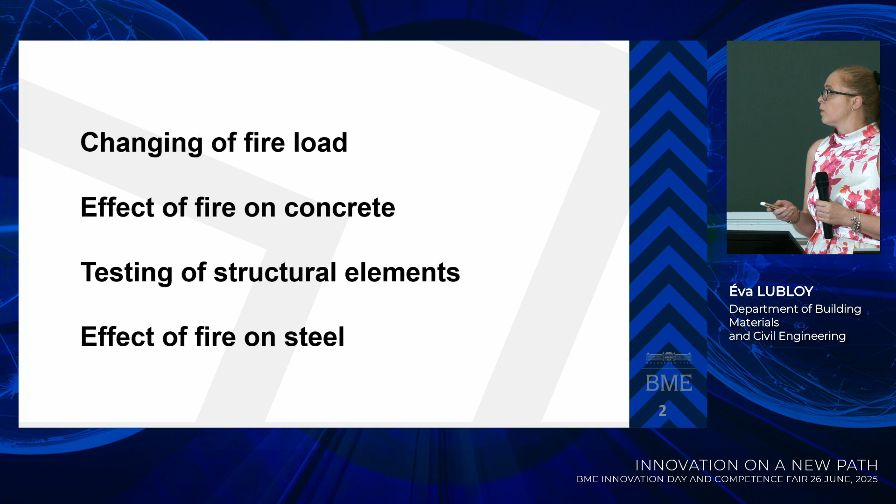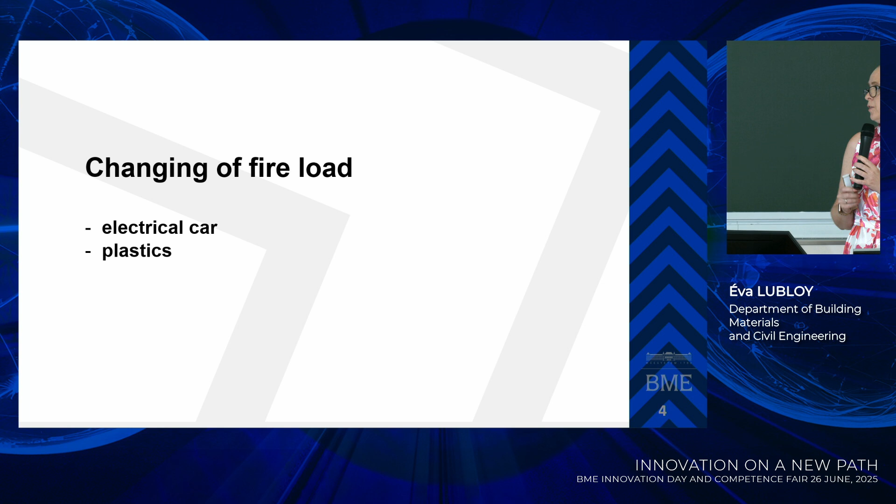The changing in the fire load is important if we see - they come from electrical cars, from accumulators, and we have some problems with the new materials, for example plastics. We should know that plastics and electrical cars have other fire behavior than other materials. We have higher fire development, and they give more energy for fire.

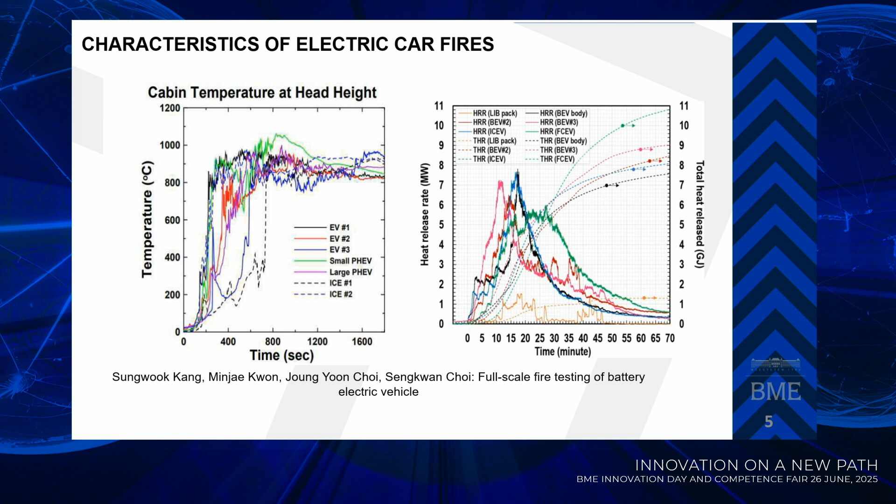I think it is very dangerous, and we should think about this, that the fire load has changed, materials have changed, and we should think more about fire protection.

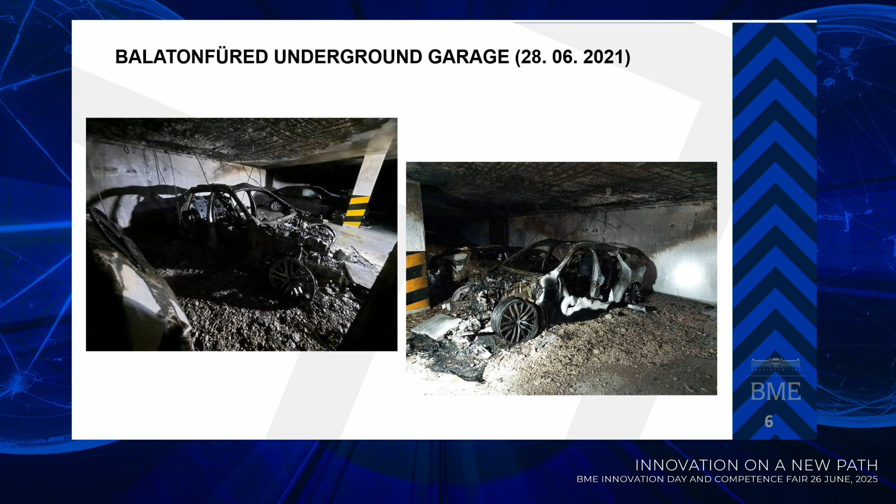It is important that the number of electrical cars is always increasing, and we should be thinking about the protection, how we could protect the buildings.

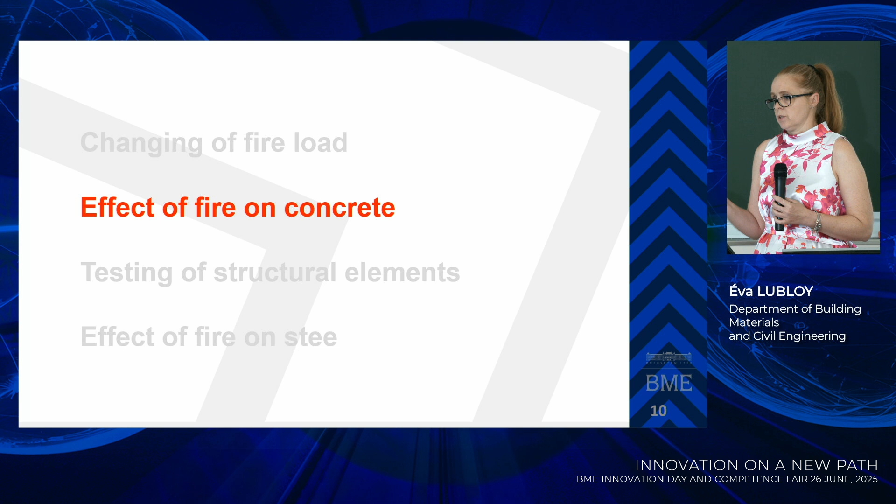What happens with concrete structures in fire? First, it is important that we have changes in concrete technology over the years. Requirements from the engineers are for higher concrete strength. From this we have higher density, and we have smaller cross sections. And we have new concrete types.

One interesting concrete type is geopolymer concrete. Geopolymer concrete doesn't use cement, and it has very high fire protection, but at the moment we have problems with the production. From this, we can have problems with concrete structures in fire.

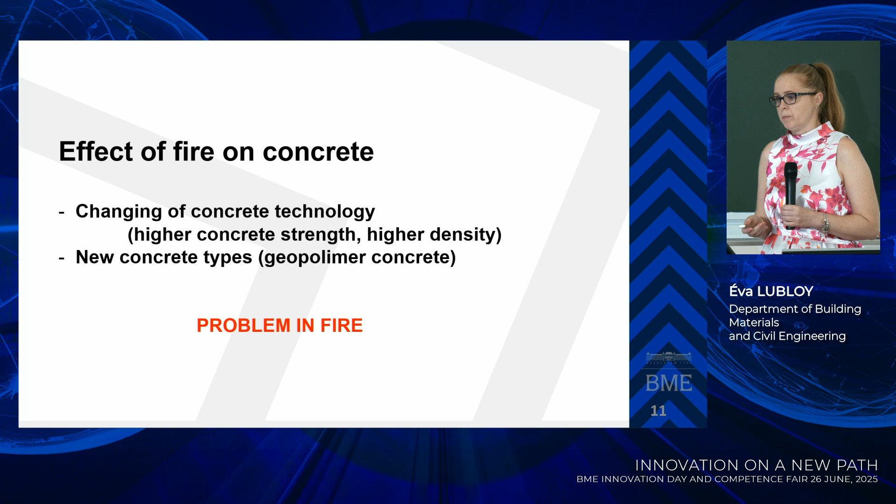What happens with concrete structures? I think it is not dangerous, the spalling of the corners. It's not good, but it is not really dangerous because we do not have damage to the load-bearing structures.

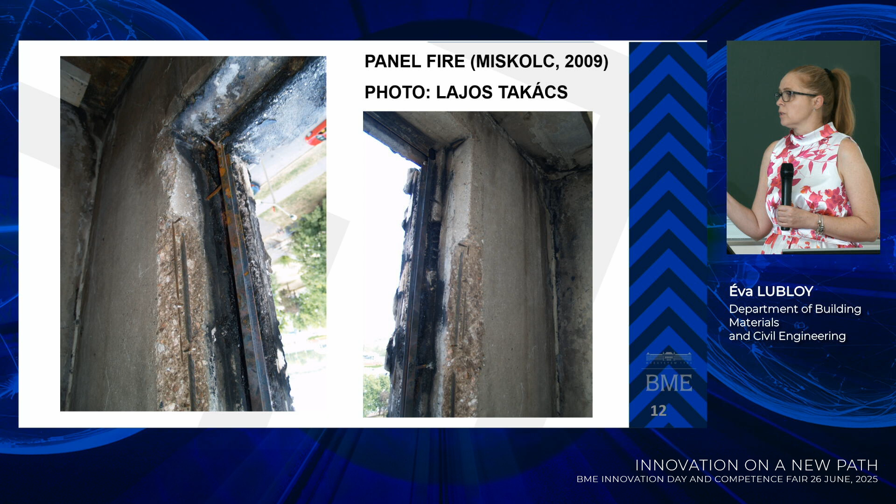But in this case, if you have hollow core slabs, then the underside can collapse, and we can have some problems with hollow core slabs. Hollow elements are really dangerous in fire because we have other heat effects inside these holes.

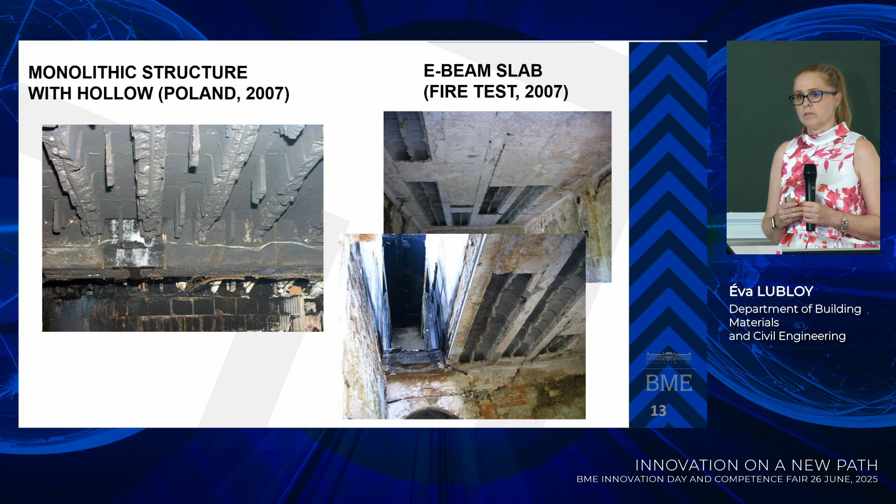You can see that is a reinforced building structure. We have relatively large deflections and a relatively large amount of spalling, but they don't collapse. This picture was made about 15 years ago.

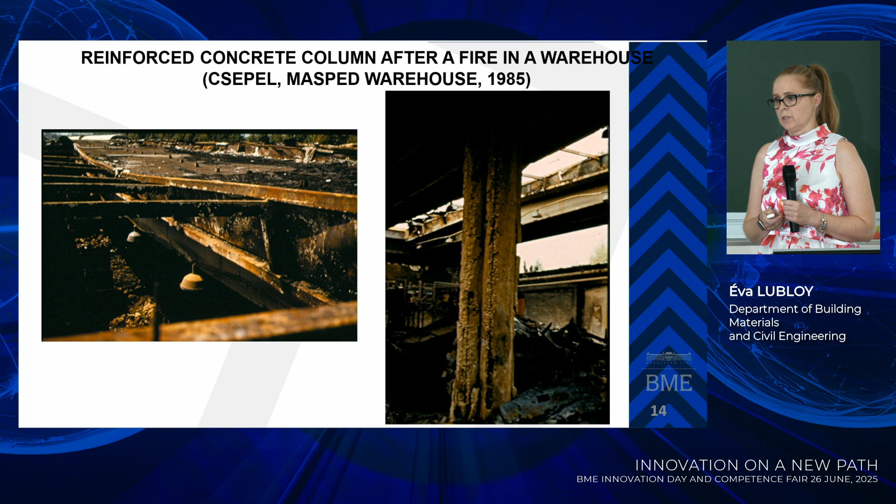In this time, we did not have good concrete. We did not have high strength concrete. We did not have high density concrete, and at this time, it was not dangerous if we used concrete.

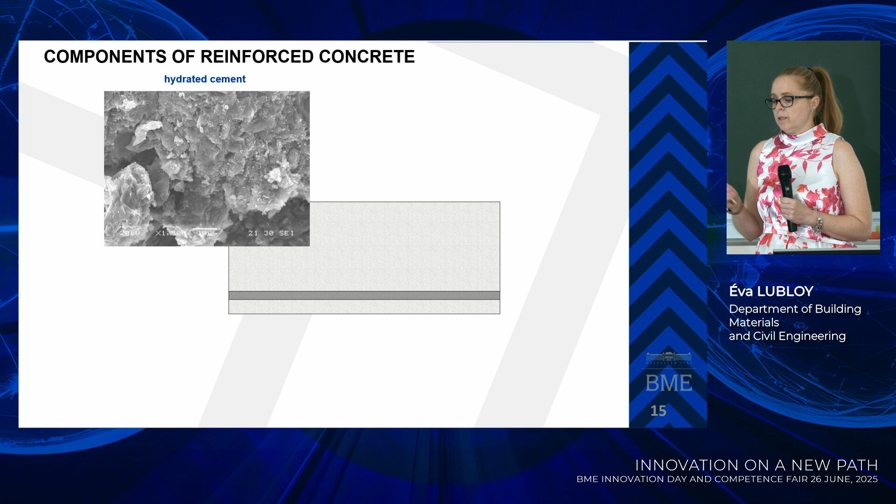What happens with reinforced concrete in fire? First of all, we have hydrated cement, and this decomposes as a function of temperature. We have aggregate - the bond of aggregate to cement stone decomposes too. We have fibers - the fibers could help in case of fire, I'll explain later. And we have bond between reinforcement and concrete, which decomposes too.

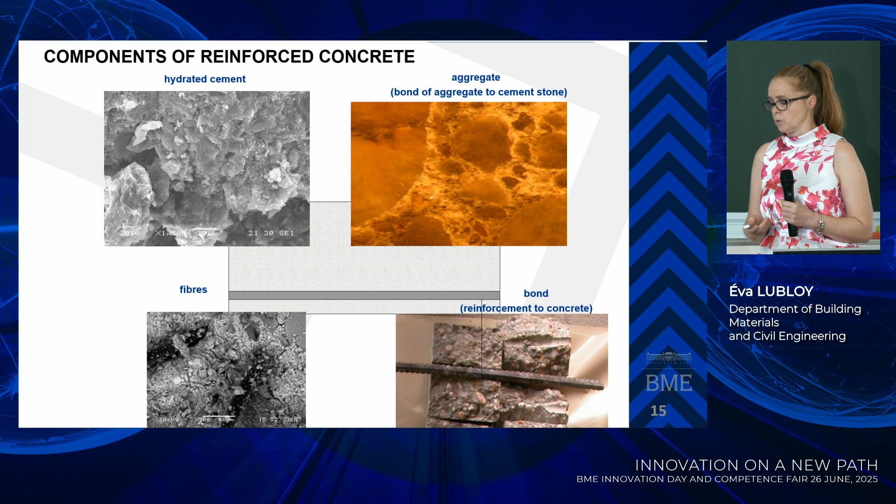Why could fibers help? We have other problems in fire, the spalling of the concrete cover. The spalling of concrete cover comes from the escape of water in fire. Water boils in fire and escapes in the form of gas.

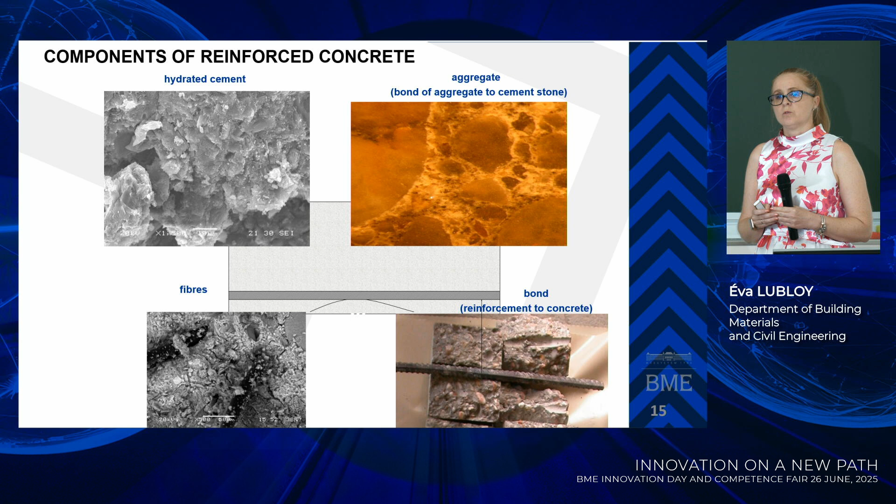But if we have no pores, we have higher density, higher concrete strength, then we have spalling of the concrete cover. If you use plastic fibers, then after the melting of the plastic you can have some extra holes, and water can escape from the concrete.

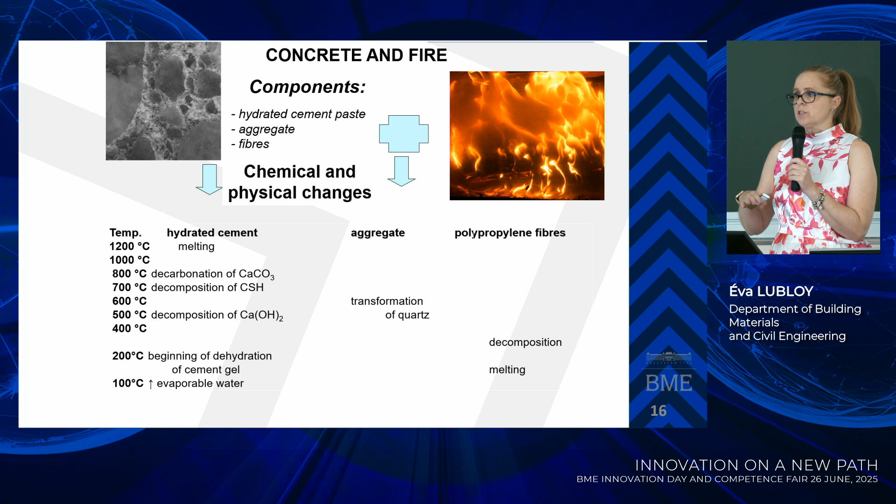The first is calcium hydroxide, and it decomposes after 500 degrees. We have calcium silicate hydrates, and they decompose after 700 degrees. Calcium hydroxide is responsible for the bond characteristics, the bond of aggregate, the bond of reinforcement. And calcium silicate hydrates give the strength of the concrete.

These are important things because by choosing a good cement type or good supplementary material, we can reduce the amount of calcium hydroxide and we can make better concrete.

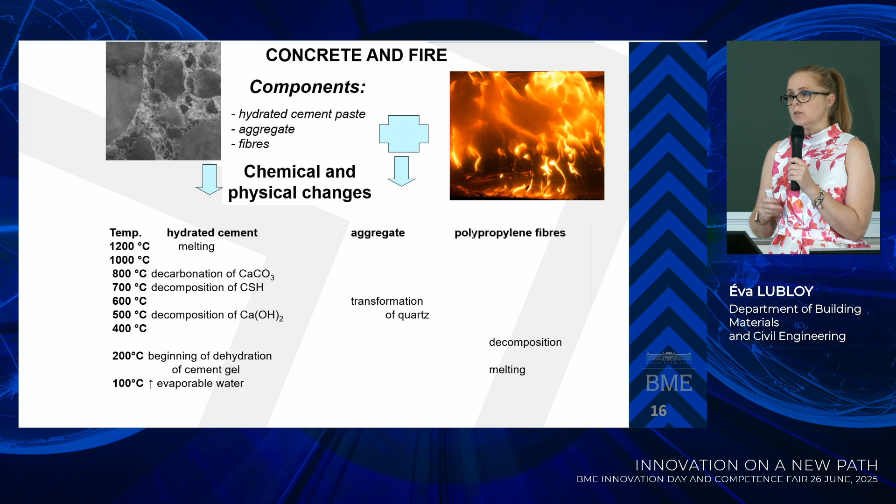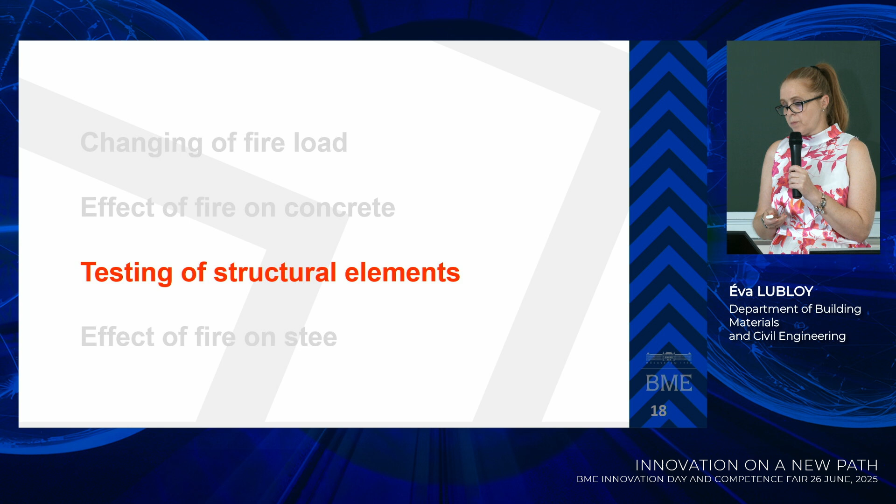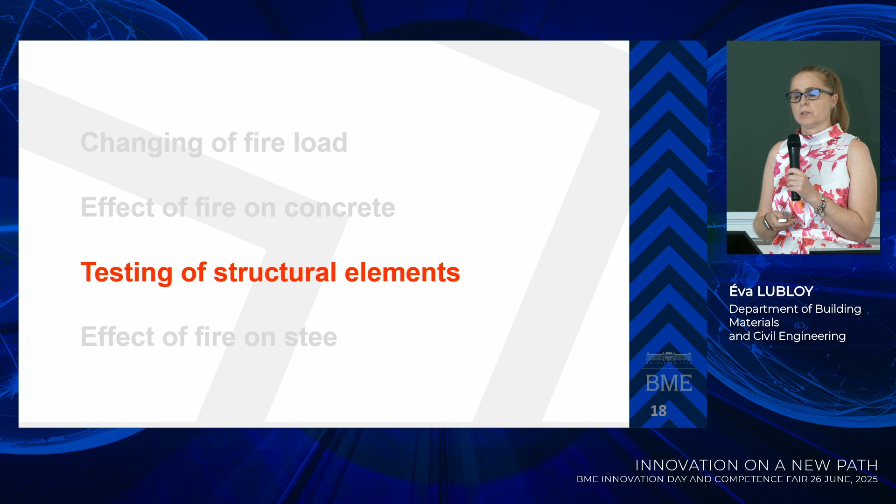It is always important working with the industry. We have made a lot of lab experiments. We say that concrete composition is perfect, but the question is, is it good for the production of structural elements? We have made testing of structural elements too.

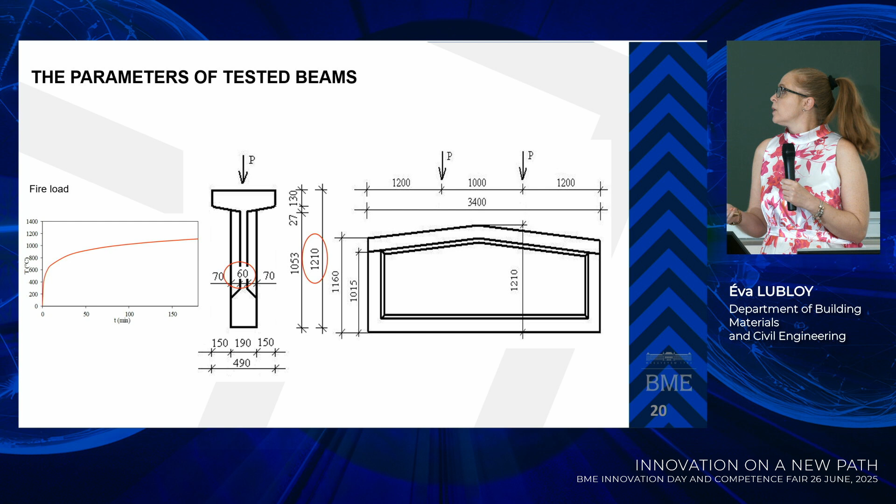I will present two interesting cases. The first was about 20 to 30 years ago. It was a very interesting element because we have a small girder, 6 centimeters is nothing, and relatively high, above 1 meter. These elements are really dangerous in case of fire because the heating of the girder is rapid.

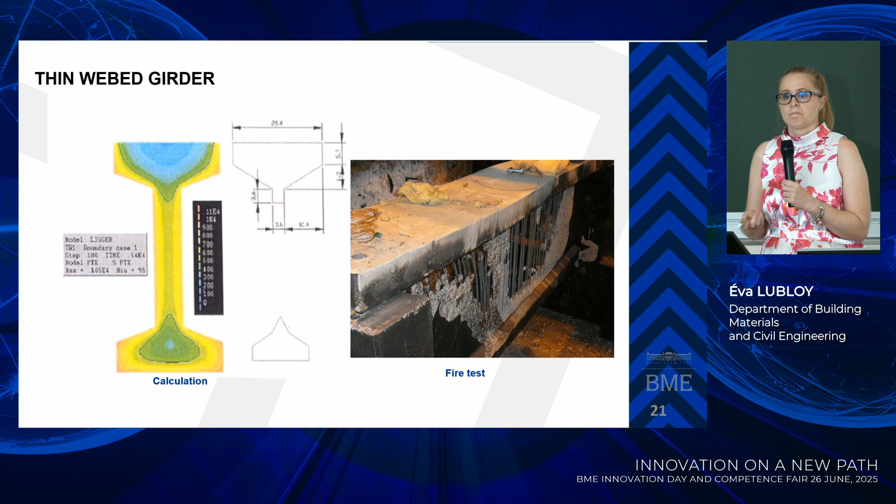Is it possible to calculate? The answer is no, because if you use the 500 isotherm method, then we see that we have no girder. In this case, we have nothing to transfer the shear forces. So we should make fire tests. Fire tests are really big element tests.

The first was the situation after 12 minutes. I think it is good to see that the spalling of the concrete cover happened, and the girder collapsed. Okay, the question is how we make good concrete composition, how we make good girders.

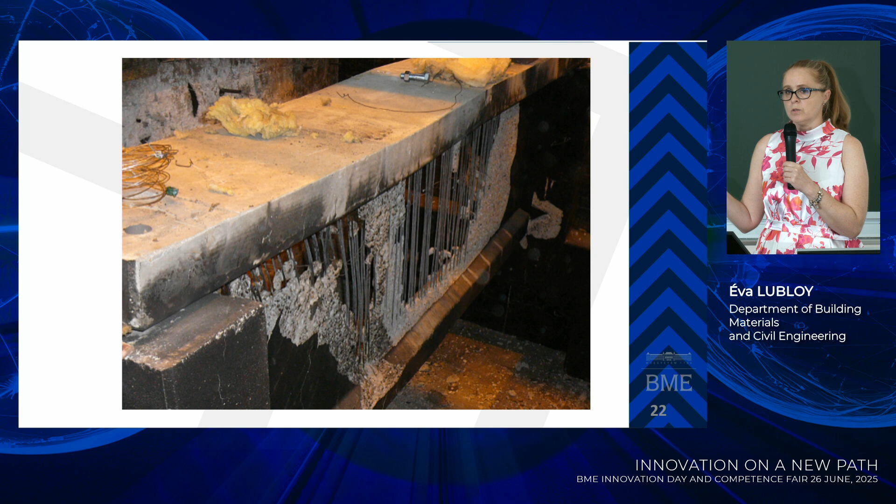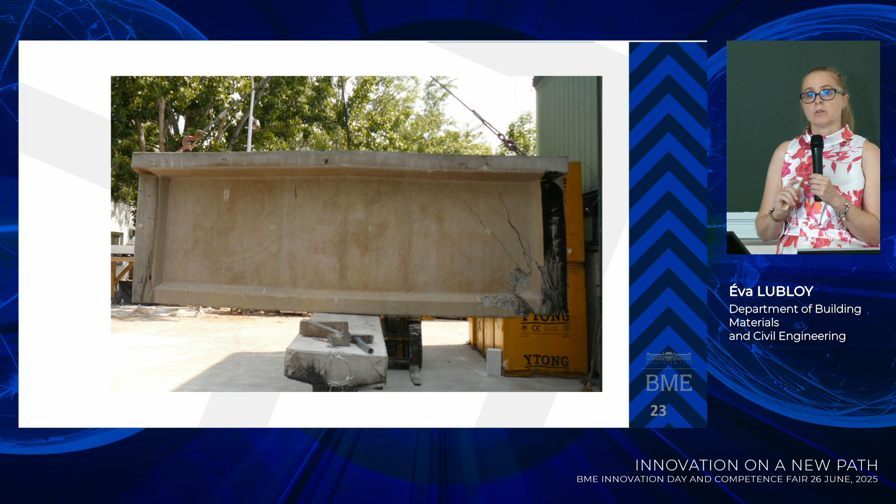The requirement was from the industry 60 minutes, and we made 71 minutes fire resistance, only changing the concrete composition. Nothing was changed in the structure, the reinforcement, or the geometry - only the concrete composition. The conclusion: we have a relationship between the microstructure and the structural element.

For that it is very important to have research in the university, so that we know what happens in small samples, because in big samples, fire experiments are very, very heavy to make. What have we made?

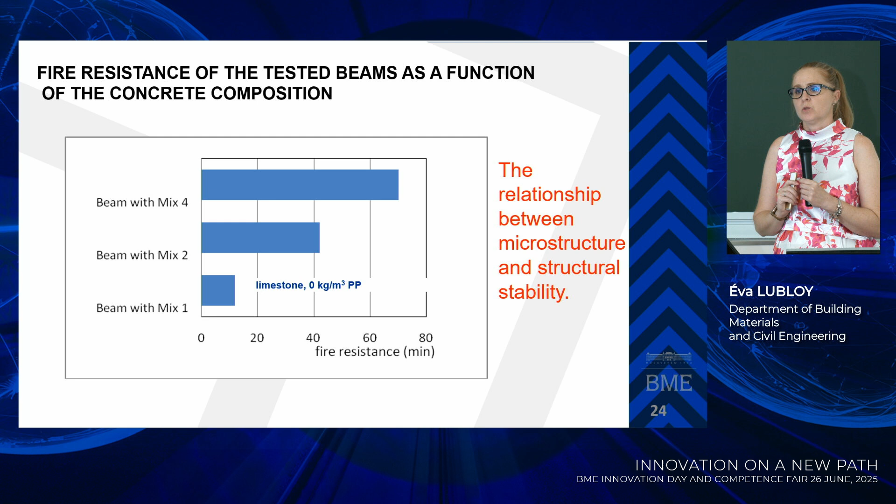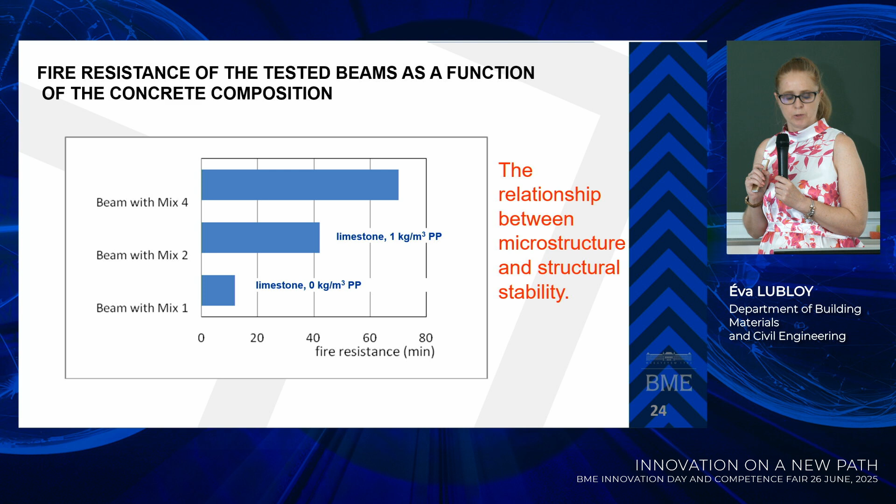First, the experiment was made with supplementary material limestone, without polypropylene fibers. Second, the experiment was made with limestone and with 1 kilo polypropylene fiber per cubic meter. In this case we see that we have over 40 minutes fire resistance. It is good, up to 12 minutes, but the requirement was 60 minutes.

What could we make? We changed the supplementary material to slag, and slag is not sensitive to fire, and we can have more than 60-minute fire resistance.

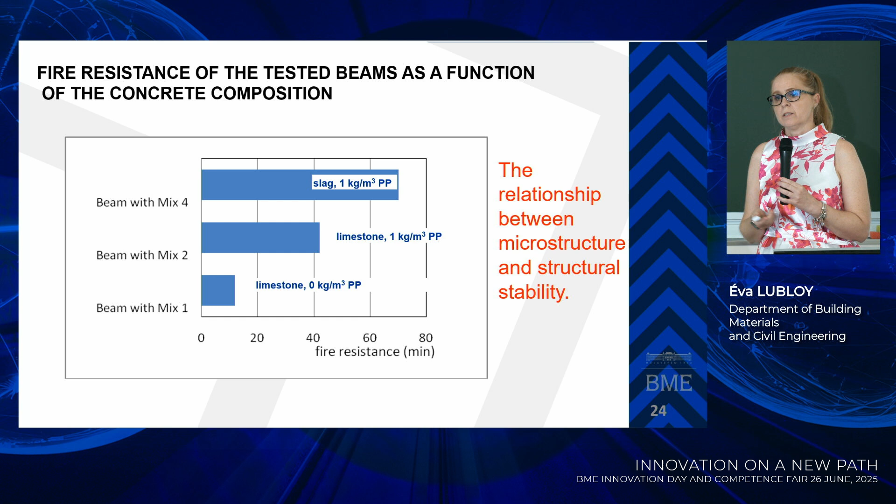Another example, from about 5 to 10 years ago, was wall panel elements. Wall panels are interesting because they have high fire requirements. They have insulation and load-bearing capacity, and they should protect against flame effect too.

We have tested this also in fire. The first result was only 90 minutes. The requirement was higher than this.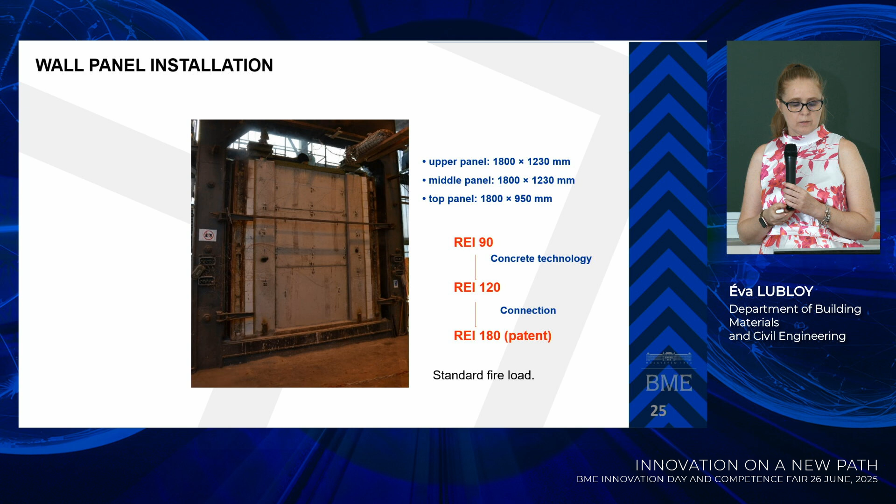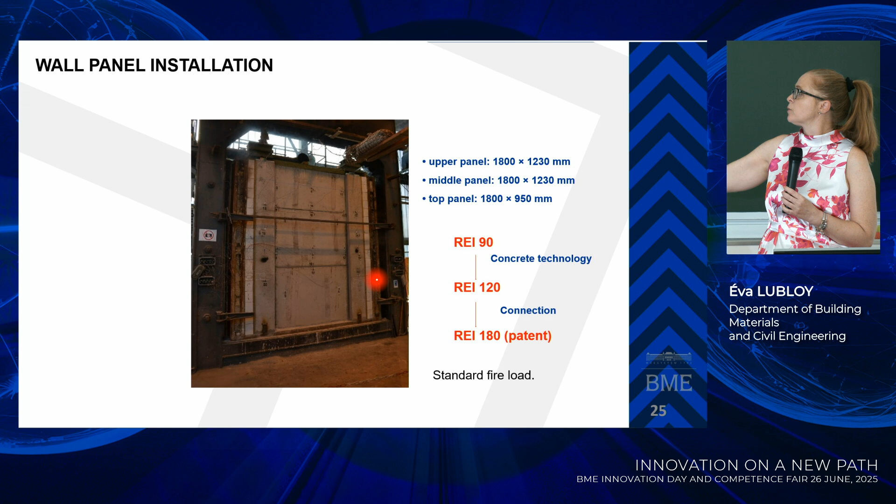Changing the concrete technology, we used polypropylene fibers and slag too. We achieved 120 minutes, and we have flame effect by the slabs. It was a problem that if the flame came out, the structure would collapse. So we worked on the connection, and after working on the connection, we could have more than 3 hours fire resistance.

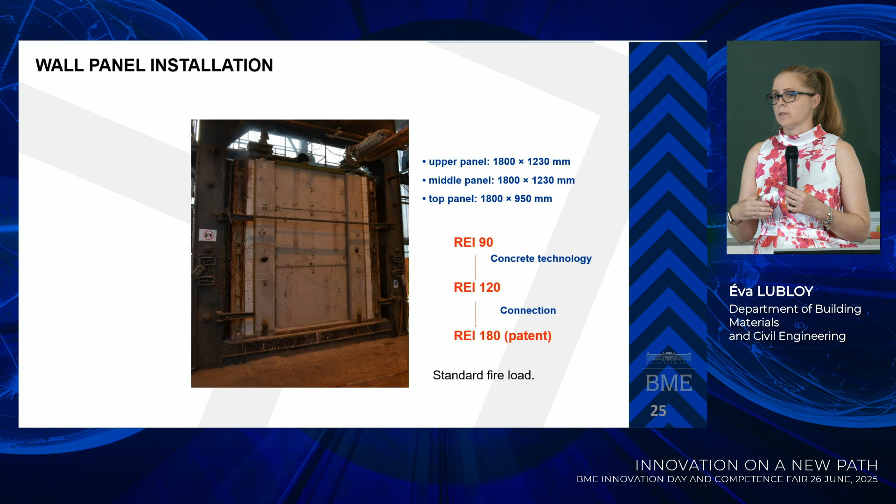I think it is very important in the industry that we have walls that could protect the industry parts. So what happened with the elements?

First, in the first mix, we have spalling of the concrete cover. I think it is clear to see that the reinforcement deformed. In the second, after changing the concrete composition, we have a smaller amount of spalling of the concrete cover.

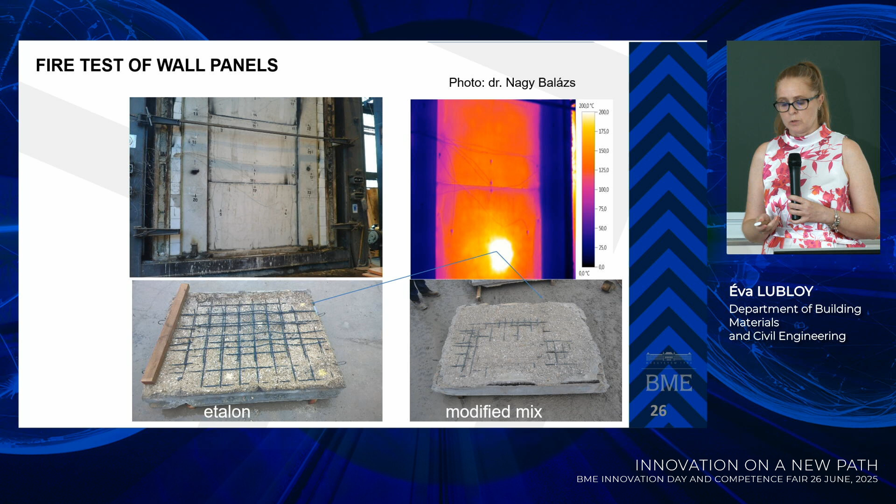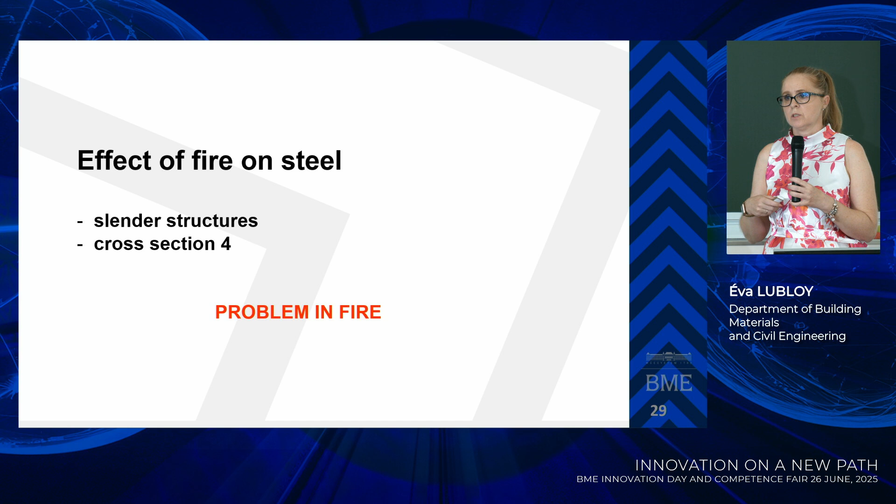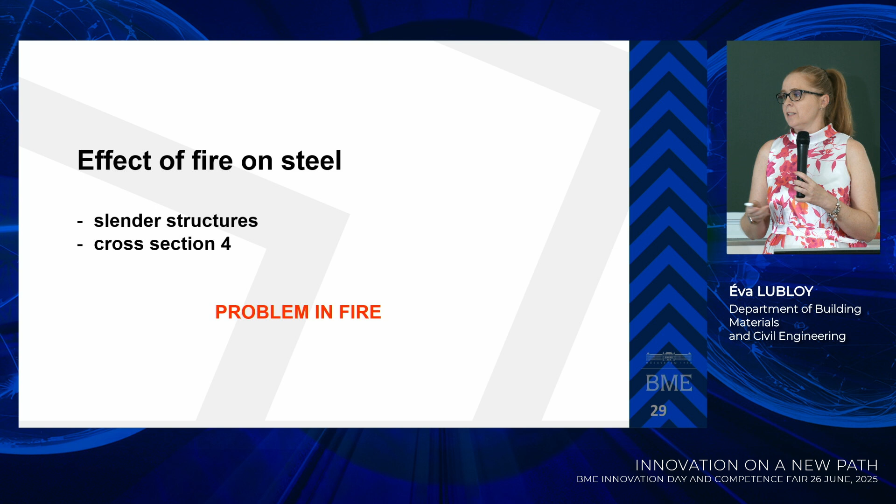What happens if we have steel structures? In case of steel structures, the direction is that we always use smaller cross sections. If we use slender structures with smaller cross sections, then we have problems - other statical problems, for example buckling, and we should make the measurements differently. Also, thin cross sections could heat up relatively rapidly, and we have problems.

How can we test the structures? We put the element in a furnace, we loaded it, and we measured the deflection and the temperature.

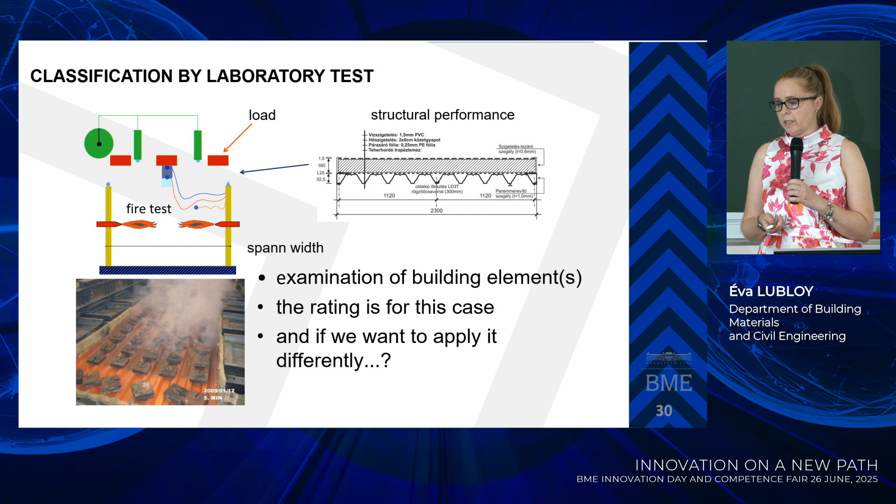If we see, this cross-section could rapidly overheat, and they are very sensitive to fire. We have made more than 20 fire tests, and from this we have developed a calculation software special for trapezoid sheets.

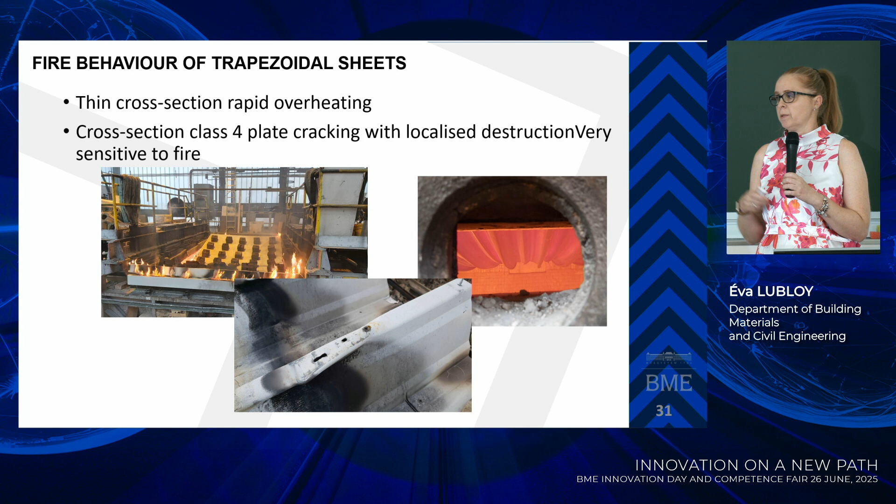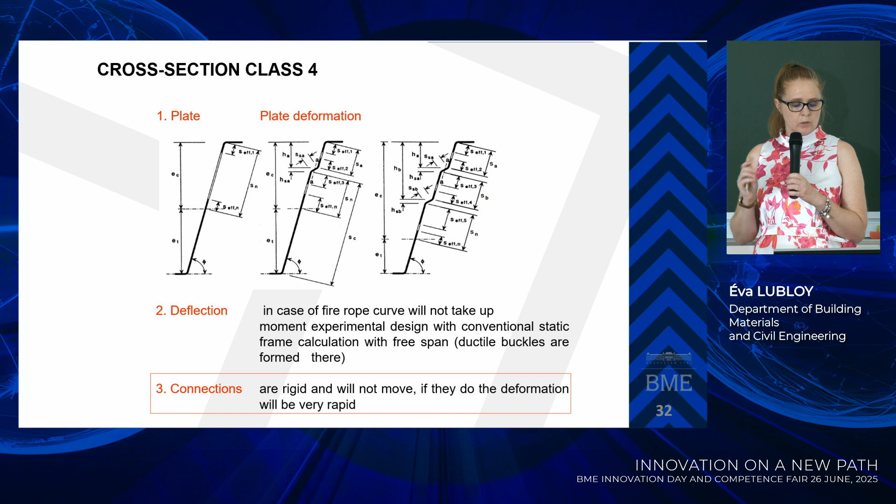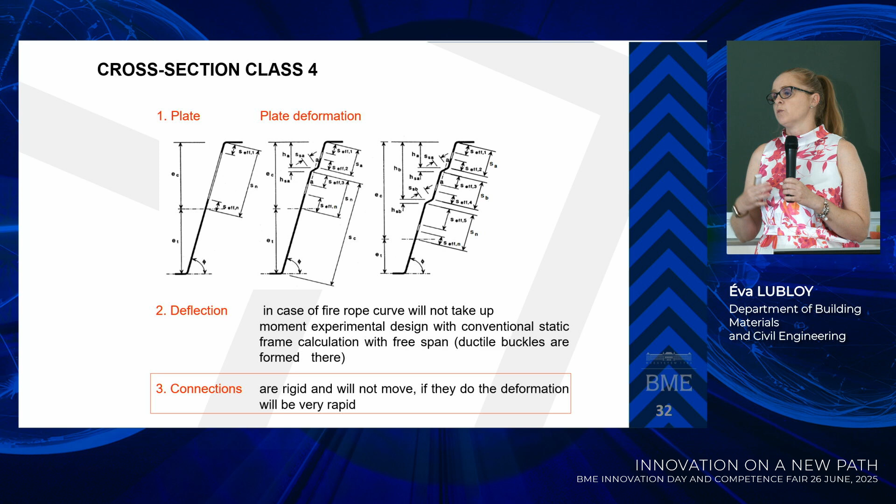We have calculated all the problems - the plate deformation, the deflection - and we could calculate the connection too. The most sensitive points, according to calculations, are the connections. That was brand new for the industry, that we should have more attention for the connections.